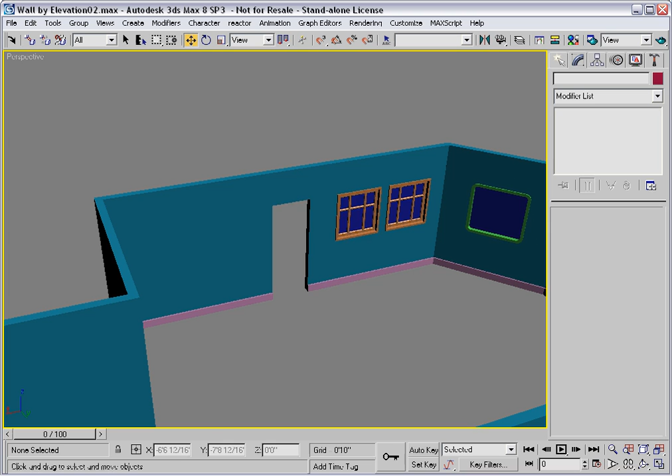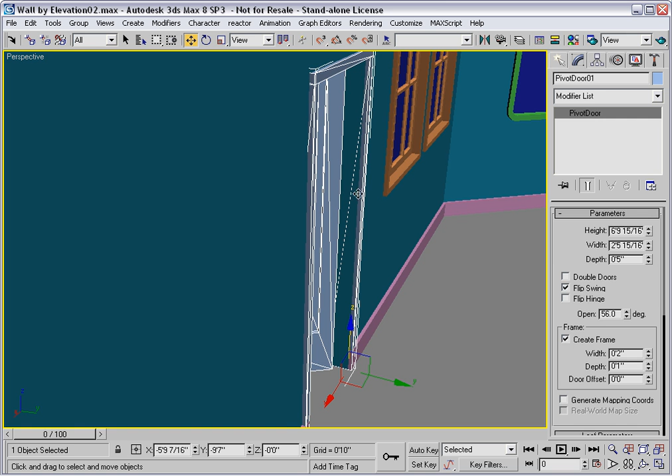I'll unhide the door and take a closer look at it. You might remember that I talked about the AEC door frames as being problematic. That's because there's often a conflict between which face will be shown. The door frame and the end of the wall are coplanar, and you can see both of them here. So there's no telling which one will actually render.

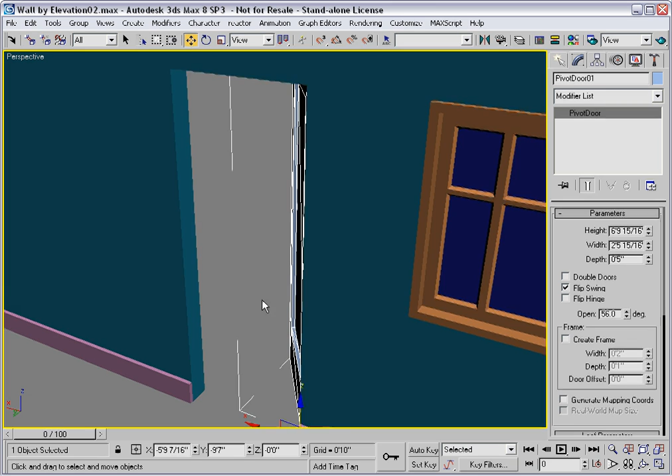For this reason, I don't like to let the doors create frames. I'll use the sweep modifier to make a door frame. So I need to make a path for that. I'll hide the base molding and sketch in a line using vertex snap. There's no need to use AutoGrid here. Sweep will work in any orientation.

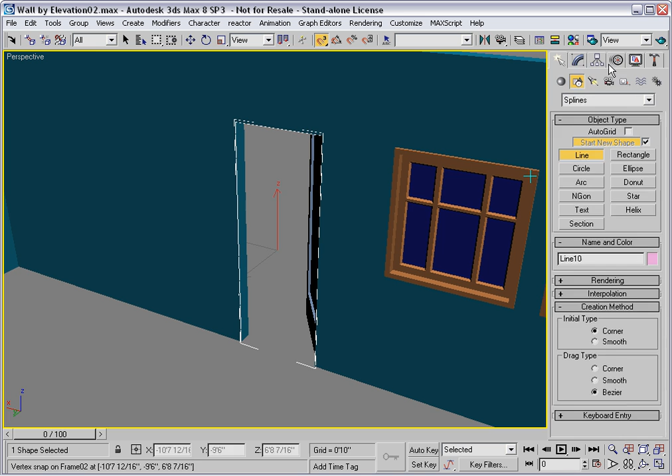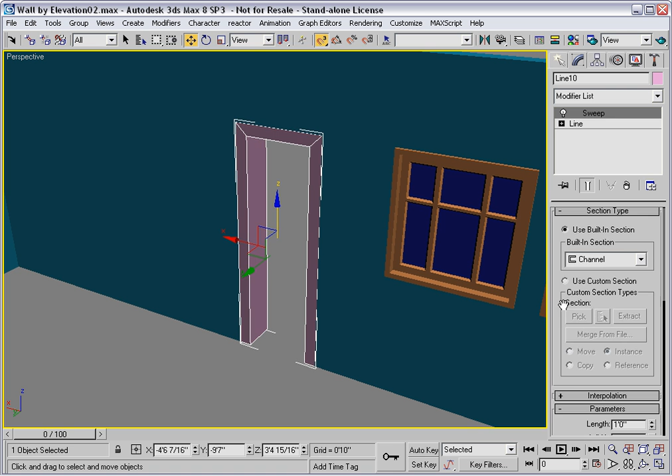Now I'll assign the sweep modifier, and we'll use a different built-in section. This time I'll use channel. And this was designed obviously for a metal object, but it works just as well to simulate a door frame. I'll set up its parameters.

The length is this dimension, so let's make it just a little bit more than the thickness of the wall. I'll make it 7 inches, so we have a 1-inch overlap on both sides. And I'll make it 3 inches wide. I'll give it a 0 thickness, and we'll talk about the corner radius later.

The first thing you need to do is concern yourself with the alignment, and it looks pretty good with the initial setting. I will need to offset it to get it in the right position though. X offset moves it into the wall or out of the wall, so I'll move it just slightly out of the wall so that I can be sure that the frame is inboard within the opening slightly. That way we won't have a conflict with the wall.

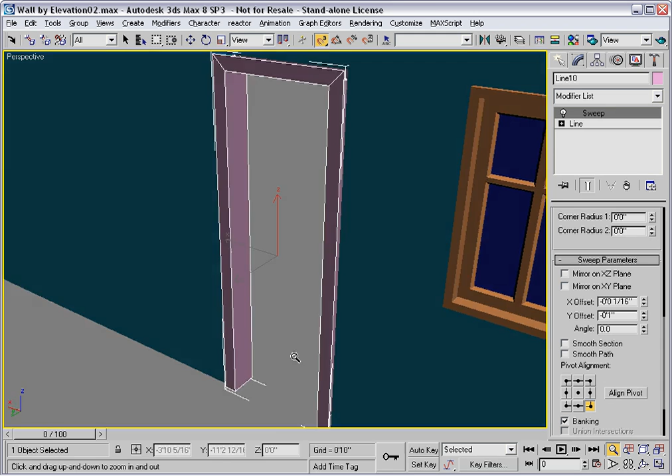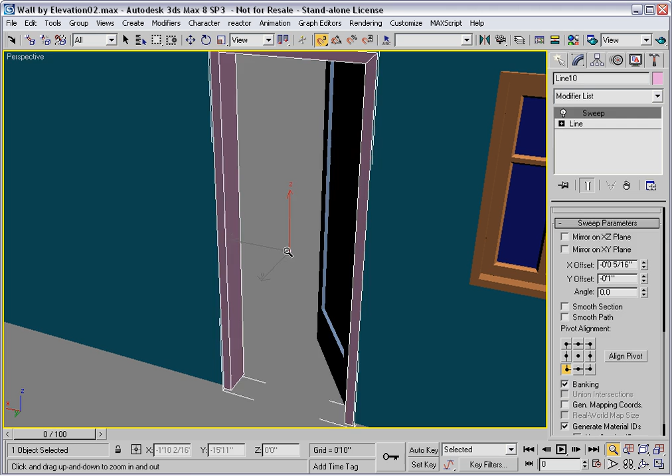Y controls this dimension, so I'd like to pop it out about 1 inch so we get an overlap on both sides of the wall. I think it's a bit too wide. Let's make it only 2 inches thick here. That's better. Let's put it there and move it inboard just slightly. Let's test it with a door. I'll close the door and then open it a little bit, and it looks fine.

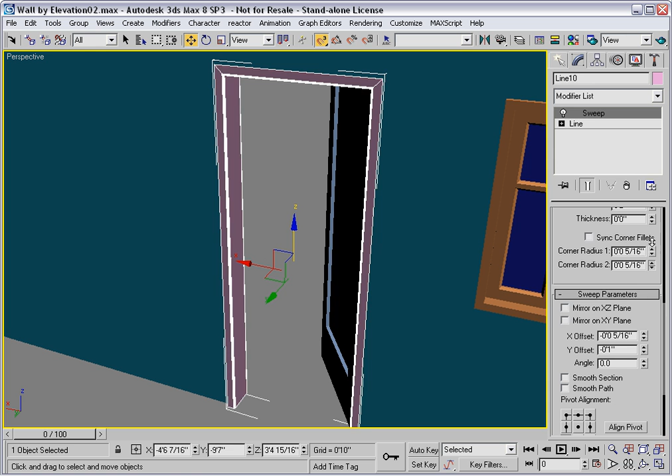One additional thing you can do with door frames is add a little corner radius to both the inside and the outside, and that will just break the light a little bit when you're looking at it and make it look more realistic. This is something you can't do with the AEC door frame, and it makes this swept frame more attractive.

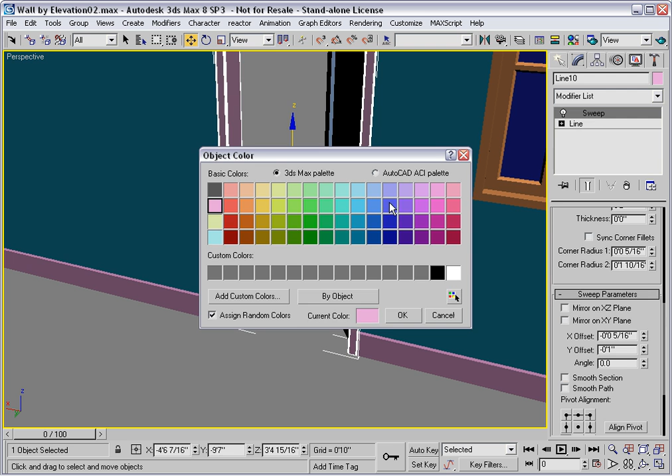I'll unhide all, and you can't tell the problem here because they're the same color. Let me change the color of the frame, and you'll see that there's an overlap down here. You could let it be, or correct it so that there's no overlap by going into the base molding and moving its vertices back a little bit so that they don't overlap.

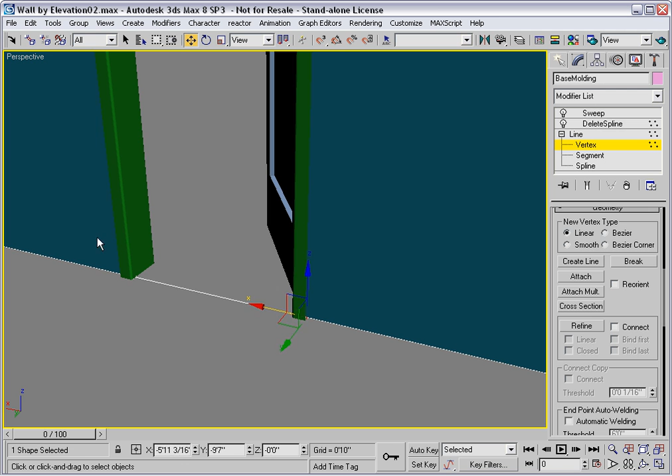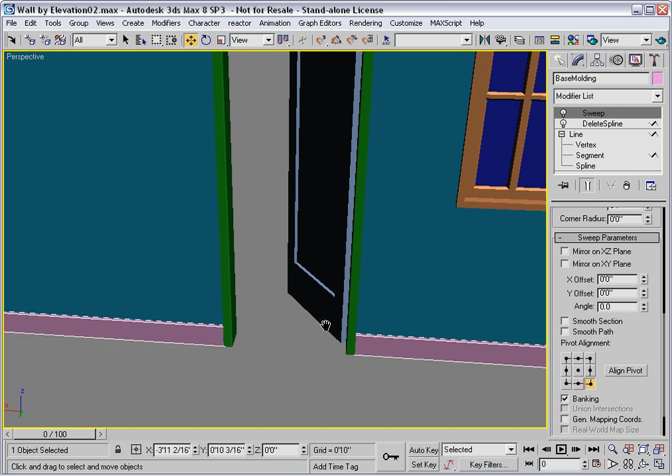Remember, the way this works is by passing a segment selection up the stack. So I have to go back to segment level and then go up the stack to keep that open. So there you have it, a swept door frame as well as a base molding.